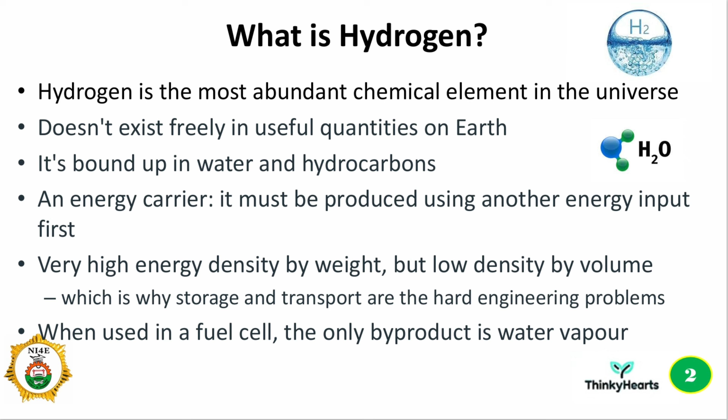What are hydrogen production color codes? Like we have in electrical engineering with color codes of resistors, hydrogen also has what we call color codes. And I'm going to start with gray hydrogen. The production shows the color actually. So gray hydrogen is produced via natural gas through steam methane reforming. It emits a lot of carbon dioxide, and there's no carbon capture technology when you use gray hydrogen, and it's the most popular form of hydrogen production today.

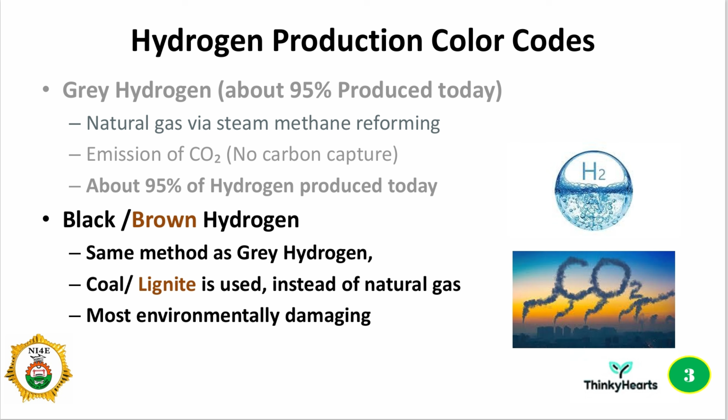Then we have black or brown hydrogen. The technologies are the same as gray hydrogen. Coal is being used instead of natural gas, and it is the most environmentally damaging. We also have blue hydrogen, same procedure as gray hydrogen, but it has carbon capture, utilization, and storage technology, and the carbon can be stored underground or later used in industrial processes.

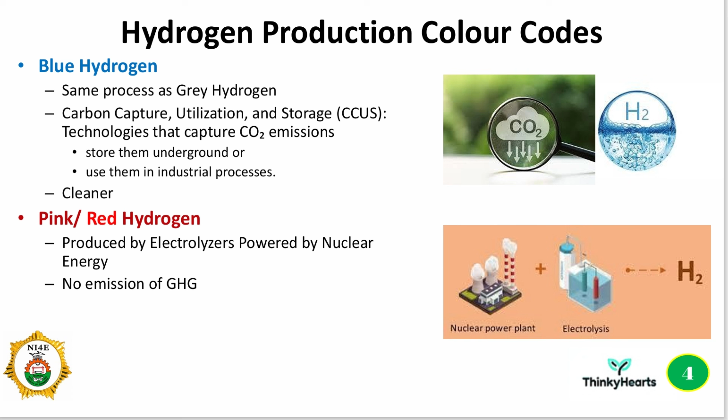We have pink or red hydrogen, which is produced from nuclear energy, and there is no emission of greenhouse gas. Then we have turquoise hydrogen, which uses methane pyrolysis to produce hydrogen and solid carbon. It is yet to be proven at large scale. There's also yellow hydrogen, and there is white hydrogen, which is new and is found in underground deposits. It's produced by fracking, and there's no strategy to exploit this presently.

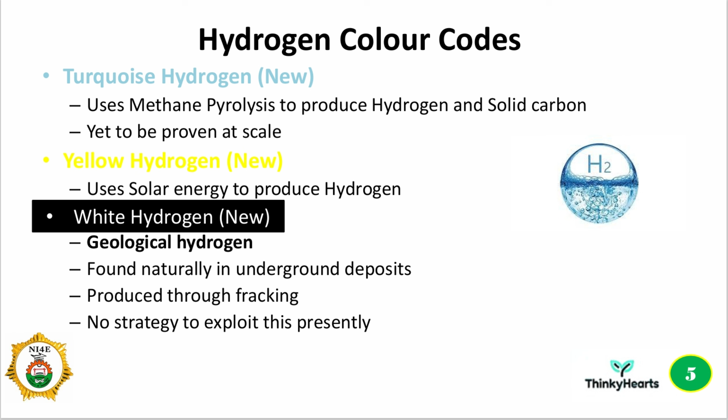So finally, we have the last one, which is green hydrogen, which is why we are here today. It's formed from a process called power to X, a process in which electrical energy is converted into other forms of products. So hydrogen is one of the products. When hydrogen is combined with other chemicals, it can form methanol, it can form urea, it can form all other products. And that is why the X comes at the end. It can be so many products.

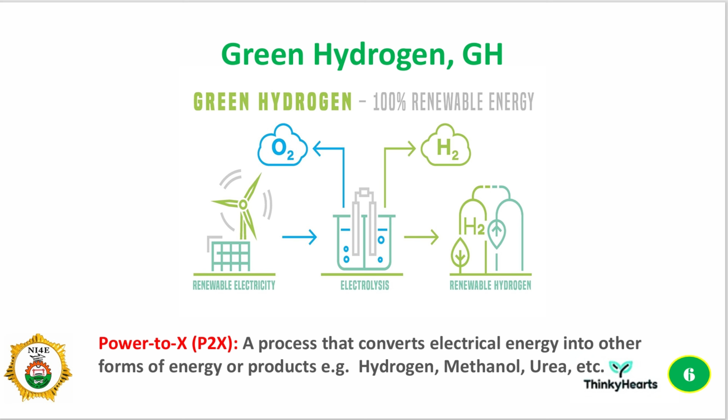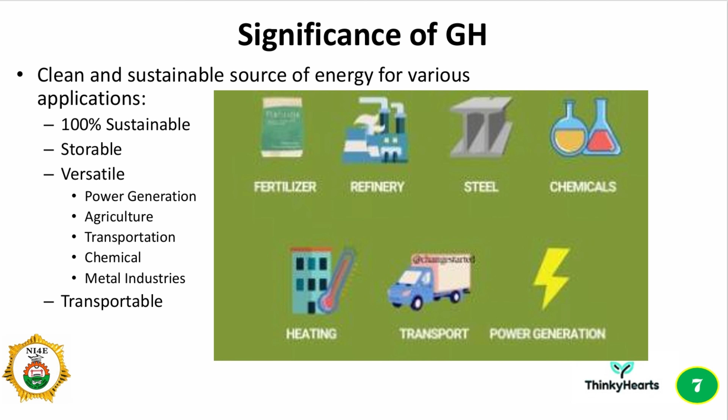That's the significance of green hydrogen. First and foremost, it is clean and sustainable because it is produced from renewable energy resources. It is storable. It is a versatile gas which can be used for power generation, in agriculture, in transportation, and so on and so forth. And also, it is very, very transportable.

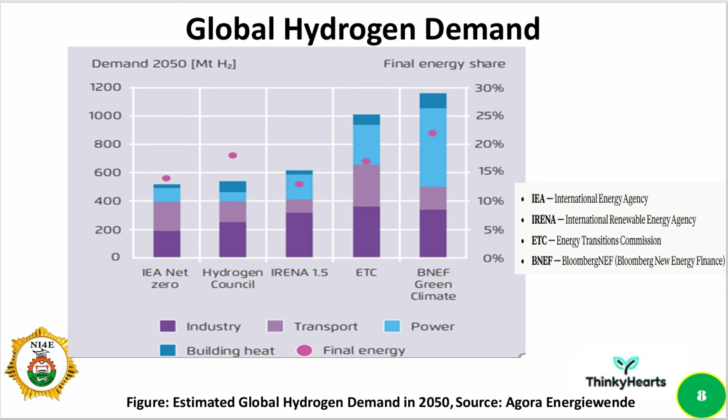And IRENA, which is the International Renewable Energy Agency, also proposes that by 2050, the final energy is going to be in the neighborhood of 14%. This leads to many national hydrogen strategies, especially if we look at Germany, Japan, and Australia. These countries are really putting in efforts to ensure that they contribute to the global context of green hydrogen. It's also good for the decarbonization of the hard-to-abate sectors.

Green hydrogen is seen as one viable solution for sectors that are not easy to electrify, especially aviation and shipping, and also heavy industry. And green hydrogen is becoming a tradable global commodity, and countries are pledging a lot of money to ensure that they are part of hydrogen in the future.

So the European Union also projected that by 2030 there's going to be 10 million tons of hydrogen produced per year, and Nigeria has a share of about 17%, which is the third largest in the continent. Also, developing countries are coming up with different strategies, especially Namibia, Morocco, Egypt, South Africa, Mauritania, and Kenya. They already formed an alliance, and Nigeria is now left behind somehow. But we are going to look at some of this information later.

Nigeria already has a real hydrogen demand, most of which is for agricultural applications with reference to ammonia, but we have not yet formed an alliance for export positioning.

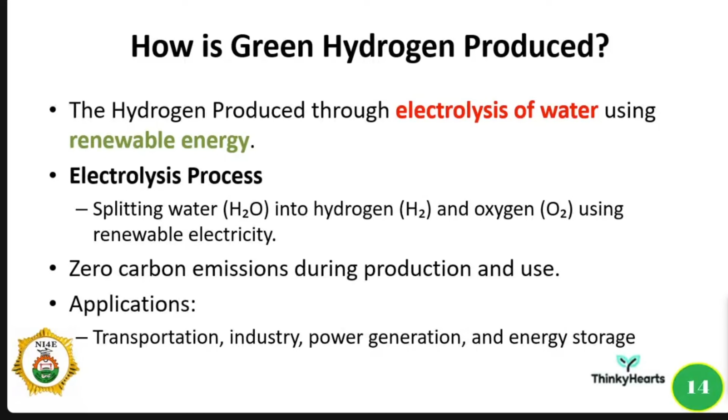So what is green hydrogen again? Like I mentioned earlier, it is the production of hydrogen through renewable energy using electrolysis of water. The electrolysis process is straightforward, which is the splitting of water molecules into hydrogen and oxygen. And at the end, hydrogen is produced. Here, there is zero carbon emission during production and use, and the applications vary from transportation to industrial applications, to power generation, and to energy storage.

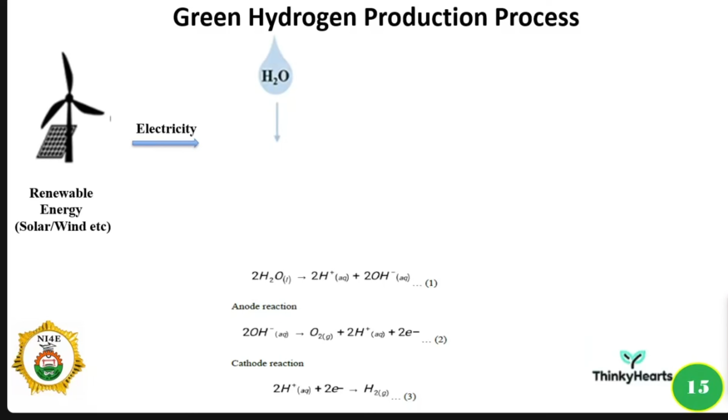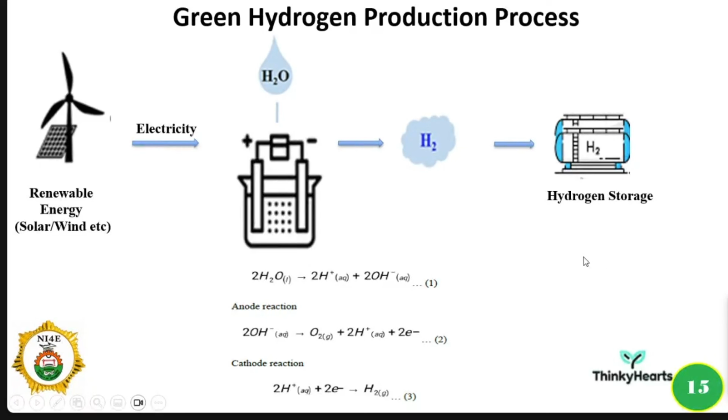Renewable energy sources like wind and solar give us electricity. We need some form of water, which will be split using electrolysis into hydrogen, which can then be stored. These are some chemical equations that are used for the production. So without electrolysis, it will not happen.

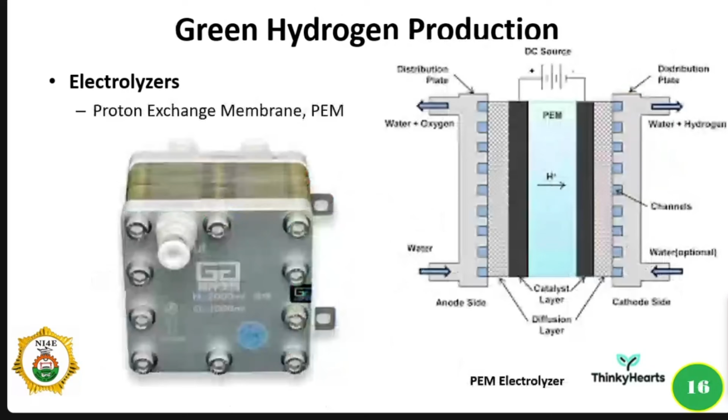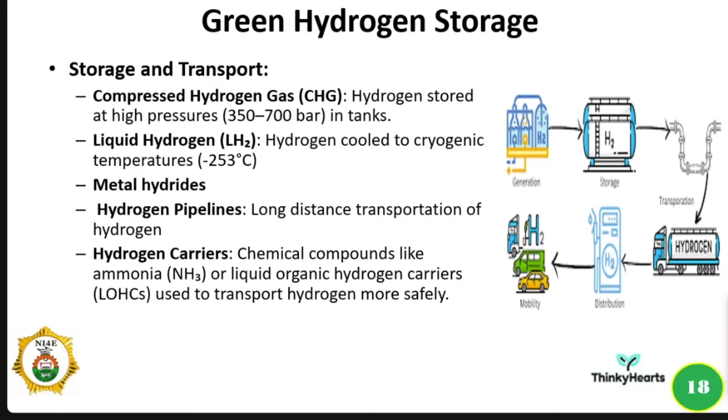The hydrogen can also be stored. These are different types of storage. We have compressed hydrogen gas, CHG. We can have liquid hydrogen storage. We can have metal hydride storage. They can also be transported using pipelines. Also, we have what we call hydrogen carriers, with chemical compounds like ammonia and liquid organic carriers, used for transportation of hydrogen more safely.

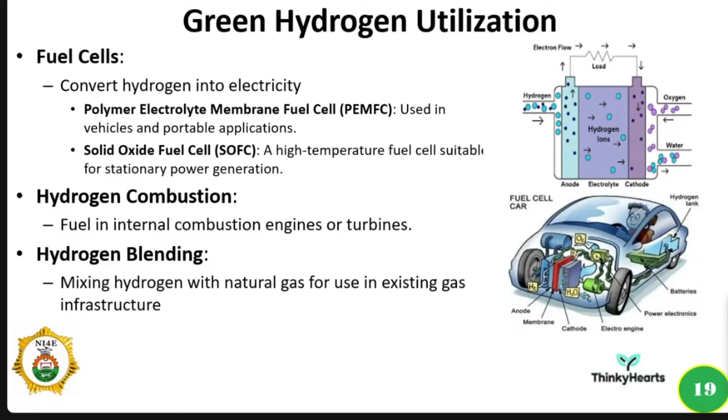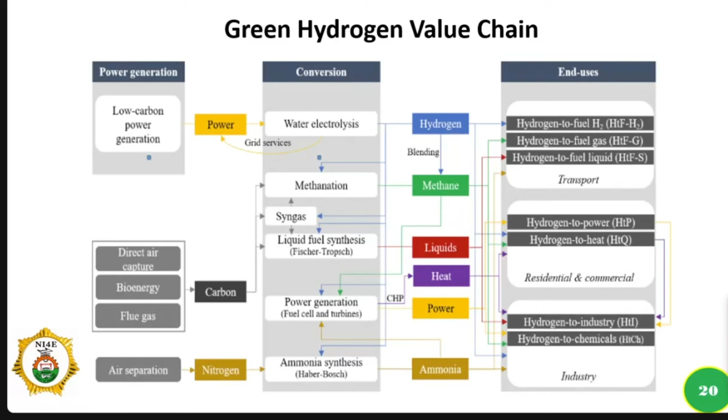So why does green hydrogen fit Nigerian specific circumstances? Number one, we have to look at our abundant renewable energy potential, which shows the fact that we have strong solar resources. The high irradiance across the country gives consistent daytime generation for electrolysis. Of course, there's also water availability. There is storage potential also.

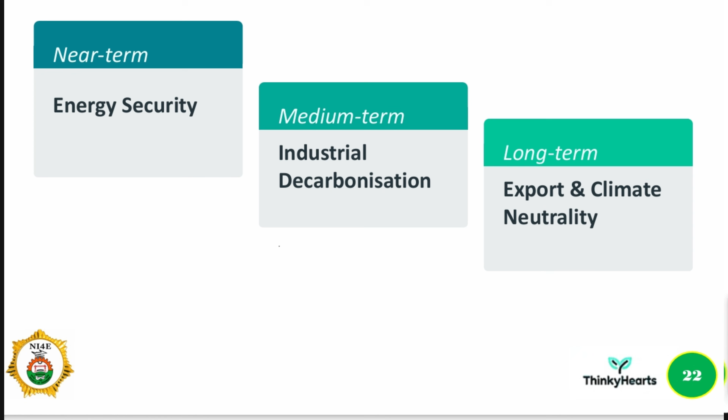So what are the pathways to a green hydrogen future? We are going to be looking at three or four, which can be energy security, industrial decarbonization, and also export and climate. The most important part is energy security, which we are going to be looking into now. So, energy security in Nigeria's green hydrogen pathway.

The most important aspect is the fact that it helps us to diversify Nigeria's energy mix. About 80% of our power is from natural gas. With the introduction of green hydrogen, it gives an opportunity to diversify our energy mix. This leads to improving energy independence. And because hydrogen can be stored, it gives us an opportunity for long storage.

It also promotes decentralized energy, and it strengthens grid stability because there are now hydrogen-based generators that can work with green hydrogen. It also supports the integration of variable renewable energy. So this gives us the opportunity to address the intermittency challenges associated with solar and wind power.

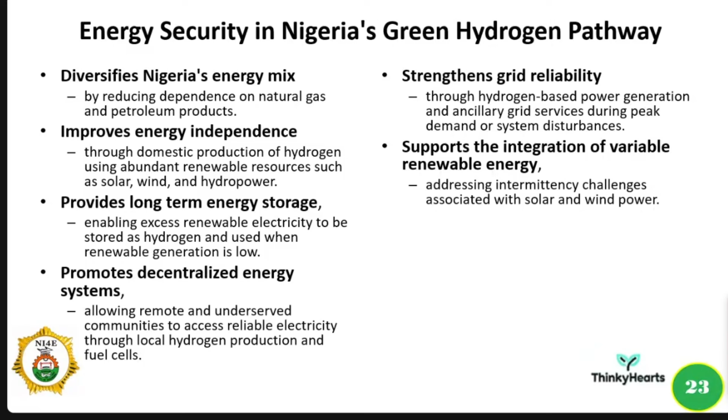So, industrial decarbonization in Nigeria's green hydrogen pathway. This replaces fossil fuel in energy-intensive industry. It substitutes gray hydrogen, which is the most popular hydrogen presently. It enables low carbon steel production. It supports low carbon cement production. It can facilitate carbon capture, utilization, and storage.

We can electrify the hard-to-abate industry using green hydrogen, especially with industrial application, and it gives opportunity to reduce industrial dependence on natural gas. It promotes cleaner manufacturing by lowering carbon intensity across industrial value chains, and the petrochemical industry can also be decarbonized, which gives opportunity for sustainability of Nigeria's energy sector.

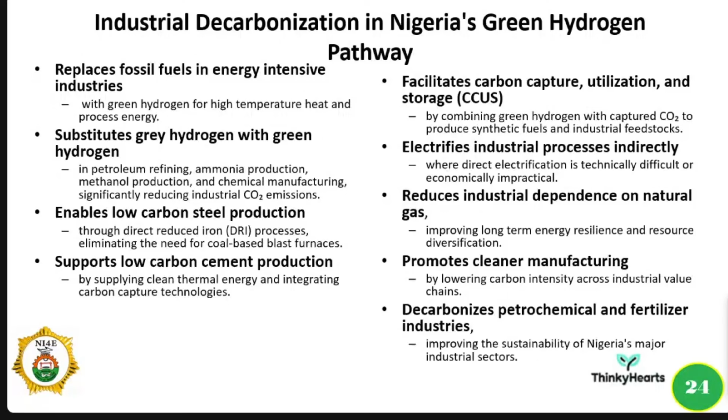Exports in Nigeria's green hydrogen pathway. This leverages Nigeria's abundant natural resources with regards to solar and wind and natural gas infrastructure, because Nigeria has a strategic location along the coastal region. So it gives us an opportunity to export ammonia. It also gives us a position as a regional leader when it comes to green hydrogen production.

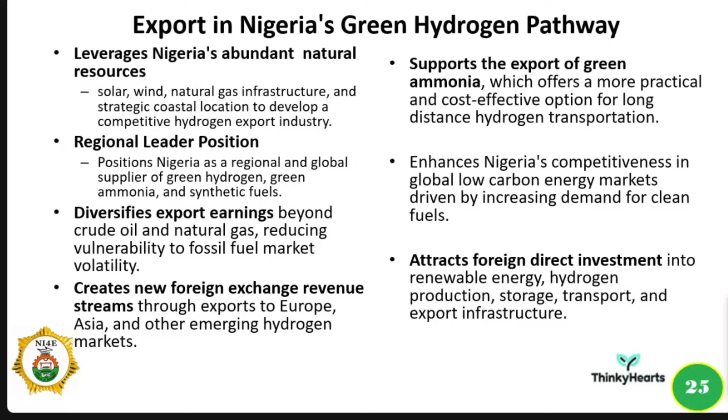This can diversify our foreign exchange earnings beyond crude oil and natural gas. So this also reduces our vulnerability to the volatility of fossil fuel markets. This will create a new foreign exchange revenue stream for Nigeria. It will support the export of ammonia, which has a good application in fertilizer manufacturing. It can also attract foreign direct investment into the country.

Climate neutrality as a green hydrogen pathway gives us a long-term pathway to achieving net zero greenhouse gas emissions across the entire energy system.

It also replaces fossil fuel with renewable hydrogen in electricity generation, transportation, industry, and heating applications. It supports the production of carbon neutral fuels, which include green ammonia, methanol, synthetic aviation, and marine fuels.

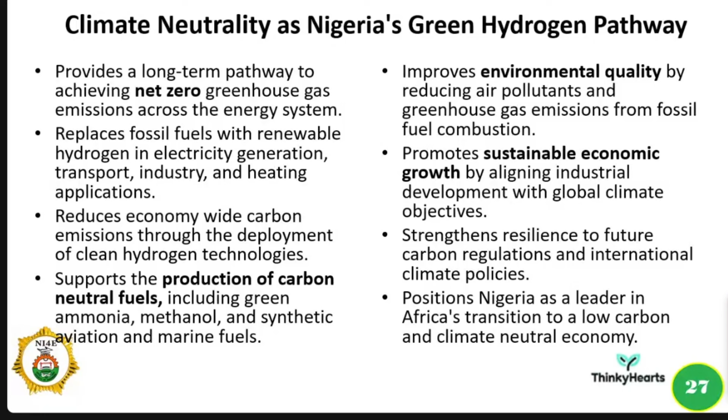Climate neutrality also improves environmental quality by reducing air pollutants and greenhouse gas emissions from fossil fuel combustion. This promotes sustainable economic growth and strengthens resilience to future carbon regulations and international climate policy, positioning Nigeria as a leader in Africa's transition to a low carbon, climate neutral economy.

So what are the challenges to green hydrogen adoption in Nigeria? The first and foremost is the high initial investment costs. Electrolyzers, fuel cells, and storage systems require significant investment.

There is infrastructure gap or limitation. There is also policy and regulatory barriers. We want clear policies, safety standards, and incentives to promote green hydrogen production, and a supportive regulatory framework which will encourage a lot of private sector investment.

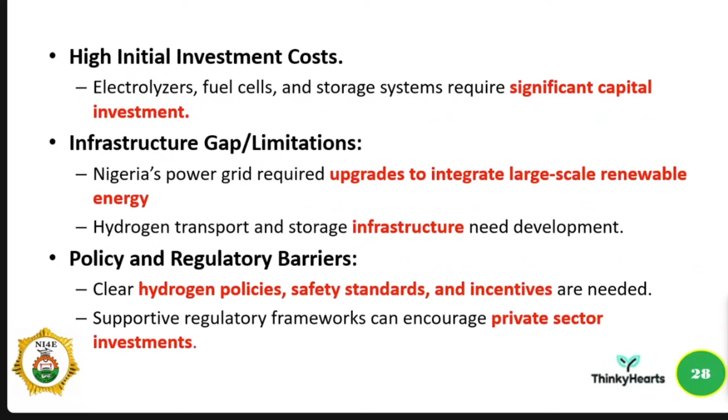Technology readiness is also a challenge, with the current stage of development of hydrogen technology and their scalability. There's a limited skilled workforce with regards to hydrogen and fuel cell technology. Public awareness and acceptance is also an issue we need to look at, because it's not enough to come with a new technology, people need to be carried along and made aware of all the benefits of green hydrogen.

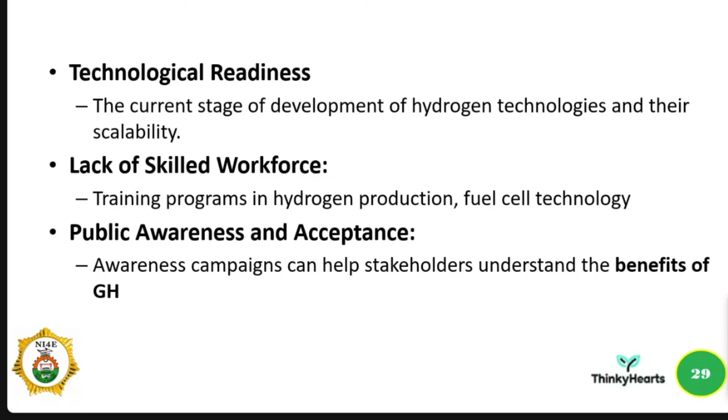What are the opportunities of green hydrogen adoption? Local content development - this will encourage the use of local expertise, materials, and labor in hydrogen projects.

Green hydrogen production for domestic and export markets - the European Union and Asian market will have strong demand for green hydrogen, and we can become a regional supplier in this regard. Green hydrogen can also be used for fertilizer production, giving room for reduced import dependence and supporting food security. There's going to be job creation and industrial development, which will create new value chains of hydrogen and employment in engineering, operation, and research opportunities with green hydrogen projects.

Let's look at some case studies. Germany is a leader in green hydrogen technology with the Green Wilhelmshaven project, which has 1 gigawatt electrolyzer capacity - that's the project for 2028. They are also investing about 140 million euros for the GET H2 Nucleus project, which has about 300 megawatt capacity, in 2027.

South Africa is not left behind - they are looking at the Hydrogen South Africa initiative. And Saudi Arabia has a new project which produces green ammonia; the plan is to produce 650 tons of green hydrogen daily from solar and wind.

What are the action plans for the engineers? We need to find a way to be involved in green hydrogen. Awareness is important, and advocacy - we have to promote green hydrogen among policymakers, and find a way into the House of Assemblies to discuss all the potential of green hydrogen with regards to Nigeria, especially with the abundance of renewable energy resources we have.

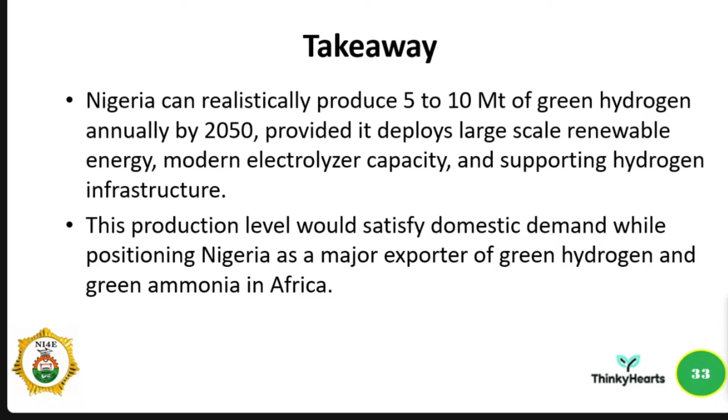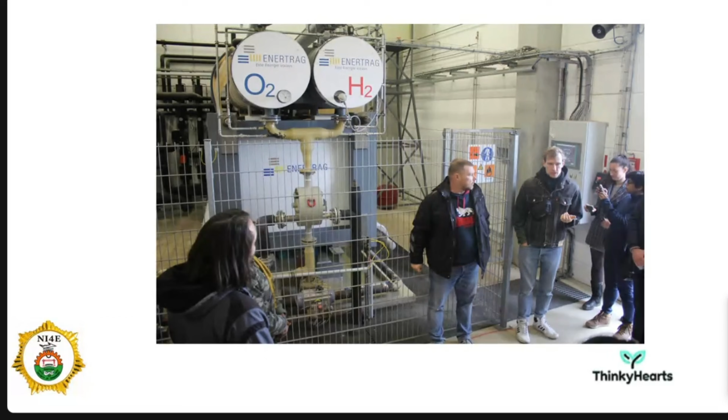This is a green hydrogen facility, and from the diagram, look at the electrolyzer - the upper tank is for the hydrogen, which is being separated from the oxygen. These are some of the participants, and some group pictures. So the technology is in existence, with availability of our renewable energy.

I think we should also key into this technology. This system is powered by wind turbines, which is a renewable energy source. One wind turbine produces a high amount of power, which makes them able to be cascaded and used. The whole height of these turbines is about 100 meters. Because of their strategic location, they harvest a lot of wind resources, which makes it easy to power the electrolyzer, which stores this hydrogen. As I mentioned earlier, they are powered using wind turbines.